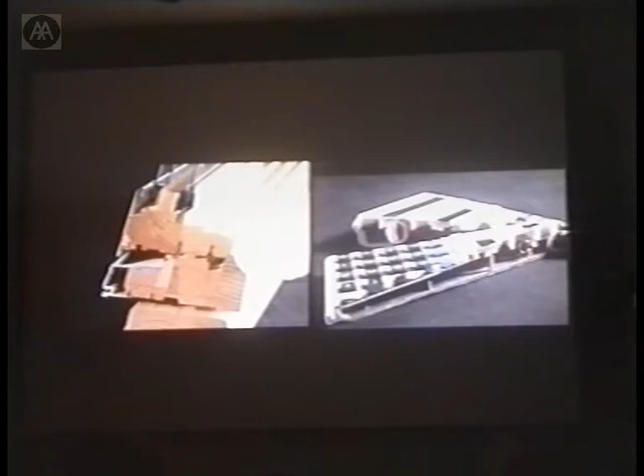So it's actually the reason why we chose the bridge to demonstrate something tonight. First of all, we chose the bridge because it is actually not a building. It's a kind of an engineer's piece. It is quite cheap. I mean, this bridge cost about, I don't know, 400,000 pounds or something like that.

It is very simple. Everything is open. One has the idea that one can see every part of the construction, and it seems to be very simply assembled. Everything is visible, but everything is secretly held together by statics, by structure, and by some technical processes.

And the second reason why we chose the bridge is because I think it is, and I didn't know when I was invited, I think it is a problem to have architects build a bridge. I heard that in London at the moment there has been a big competition about a living bridge or something like that, and I have only seen some small pictures of 2 or 3 projects, and I thought it might

be interesting to have a kind of an antithesis to that, because our main effort with this bridge was not to separate the architectonic from the static interest or idea, but to bring them together up to the point where the structural aspect and the architectonic or sculptural aspect is inseparable.

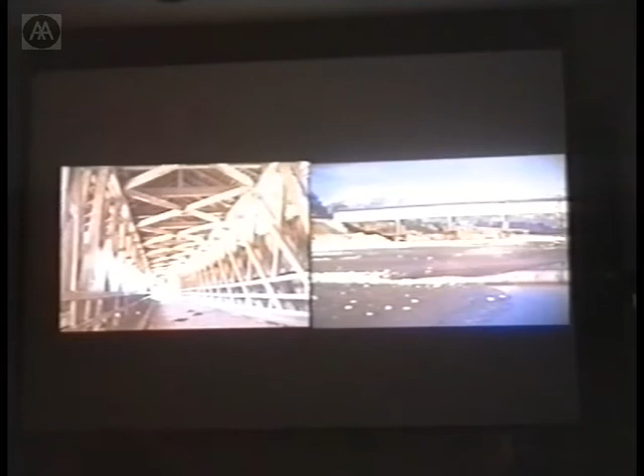And when we started with that, we had the aim, or we had the idea, to completely change these systems. The next one, and we came up at the end with that scheme. Actually, the scheme is very simple. You have 2 chords, an upper chord and a lower chord, and 2 types of kind of shear walls, here one and here one, thank you, and a second bridge which connects, as we can see, by a stair, another point on the riverside.

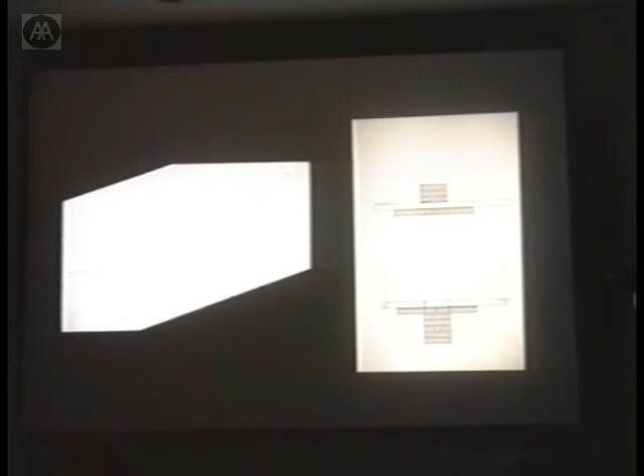And on the right-hand side, you have the type of section with these 2 chords, with a type of bar on it to support the roof, and a bar on the bottom to support the floor. So this is actually the system. Now, to understand how that worked, I have to explain how we came to develop this type of, I think it's a new statical or structural system, not only in wood but maybe also in concrete or something like that. The next one.

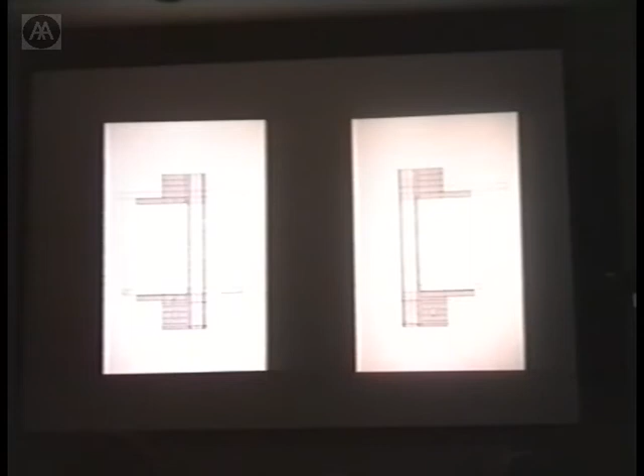First of all, there were two reasons. The first idea we had was, these are the end sections with these hollow shear walls on the end here. The first idea we had was, the next one, that we took a law of building wooden bridges and somehow perverted it. And this law says that

traditionally, for centuries now, you had a bridge with, for example, a truss or a structure which is made entirely of wood, and which, in order to be protected from the rain, has to be covered by a secondary element like the roof or the wall, which can be the railing or I don't know what. And we thought it might be interesting to develop a wooden structure which shows the quality of the structure itself.

So this was a Swiss bridge of the 18th century, which doesn't stand anymore, unfortunately, which is a fantastic structure, in my opinion. But it was completely covered, of course, in the same type as this one here. And therefore, we tried to develop a structure which protects itself by the roof. The next one. So this was the traditional type.

The basic idea was to work with only one truss in the middle and to have a roof and the floor on top, like with a double T-beam or something like that, which protects the open truss from the rain. Then the problem was that that would make two separated spaces and two separated ways on the bridge. And we tried to find some system which would allow us to connect these two spaces. The next one.

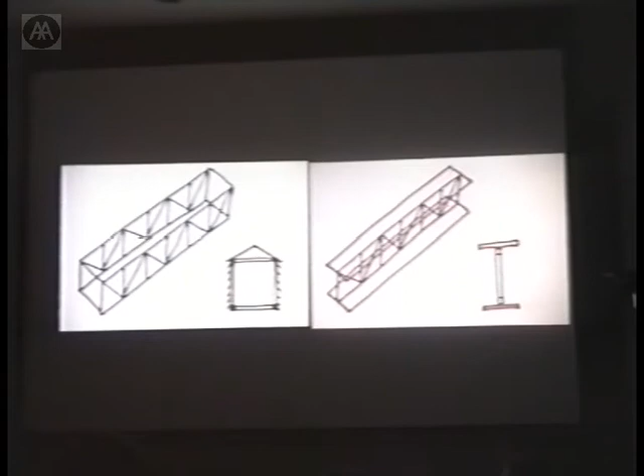And therefore our engineer came up with that Brunel bridge of a truss with such large fields that it starts to lose its character of a grid and seems to be composed of single elements. So we tried to introduce a truss with only three enormous fields of about 15 meters or something like that.

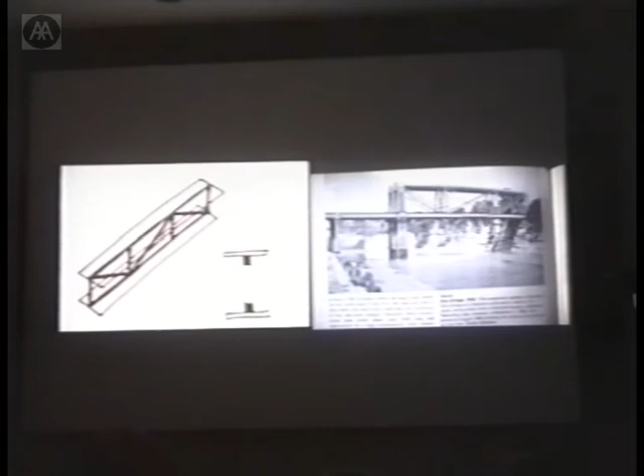But also in this scheme we had this kind of diagonal in the middle which would somehow separate the two spaces, even in the case when you could, for example, pass it, as in this. I mean, this is a very hybrid thing which we liked a lot. But we then, the next one, continued

trying to somehow avoid this separation of the spaces, and the engineer then suggested making the upper and the lower chord so strong that it might hold in the middle without any diagonal, and on the other hand he would make the other fields on the side, these two diagonals, very, very strong. So we had a kind of a window in the middle which connected the two paths on the bridge, and from there it wasn't too far to the next step.

The next, oh well, sorry, I have to go back. That comes later. First of all, I have to explain how that statically works. I didn't know that before as well. So it was developed during the competition. So the next step then was that we covered the end fields and left away these diagonals and made the last fields kind of shear walls. And this system works as follows.

The next one. The traditional truss, as you may know from your education in statics, as architects as well, under load puts stress on the diagonals, which can be in this direction or under pressure in the other direction. The system we chose is a kind of a perversion of the so-called Vierendeel system.

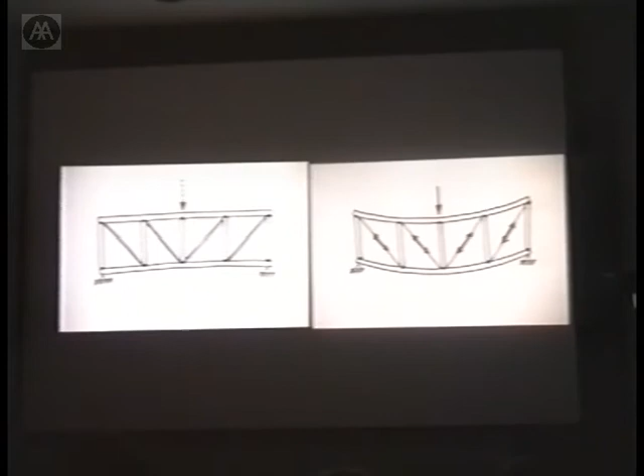The next one. The Vierendeel system was developed in steel structures for bridges at the beginning of the century and avoided these diagonals. As you know, in the truss you have here these joints which aren't stiff at all, and Vierendeel, a Belgian engineer, tried to avoid these diagonals by making these joints completely stiff, so that every vertical post can take a certain amount of shear stress without connecting one joint diagonally to the other one.

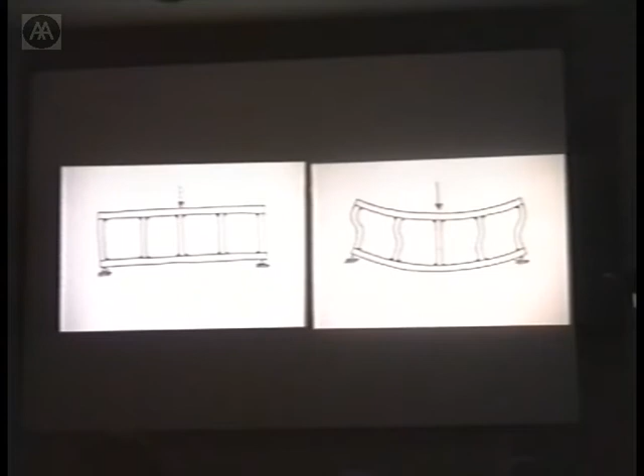And what we made now, the next one, this is one of the first Vierendeel systems. I think it was a railway bridge or something like that, and this is a typical stiff Vierendeel system connection in the edge. The next one.

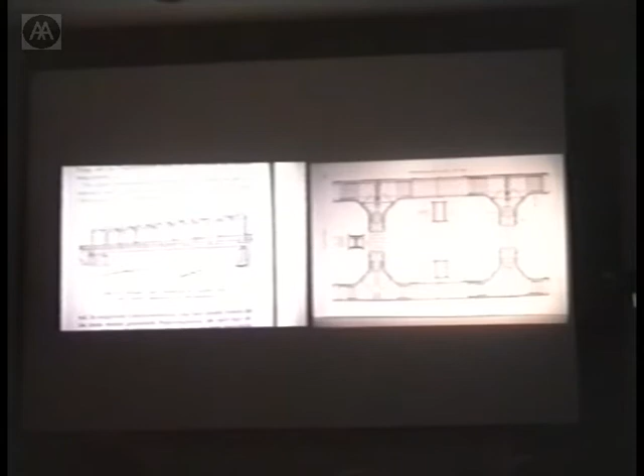And what we then made out of it was a kind of a Vierendeel system with extremely huge posts, which are these walls, and with an enormously strong, very heavy chord in the middle. That means that you, of course, have enormous stress in these edges, because the bridge is about 50 meters or something like that, which isn't too small. It's also not too big, but it isn't too small for a wooden bridge. And these shear walls here now work like the posts in the Vierendeel bridge.

So you move all the stress from the middle through this point into the walls, and this deformation, I mean, it never will deform like that, of course, but it shows you how it really works under stress.

The next one. So the other reason was, now we had a kind of a system which was perfect in our opinion for our first target, that we had the structure in the middle of the bridge, and it was protected by the upper chord and by the lower chord from rain, so we hadn't to cover it anymore.

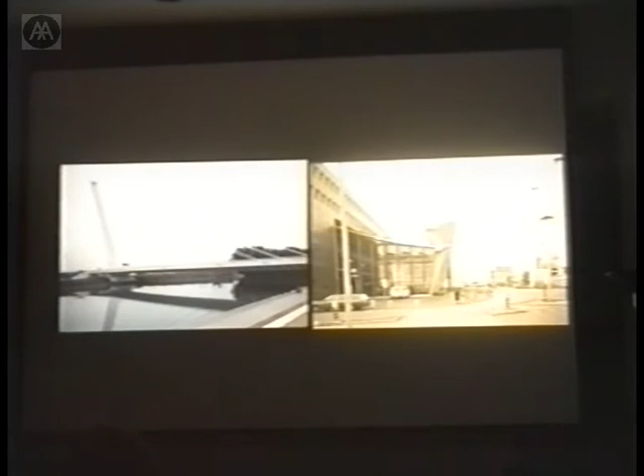And so therefore, I didn't know that in 2 days you will have the next one, you can hear the contrary, because Calatrava will be here, and the slides have been in before, and so we did exactly the contrary. And Calatrava's target is somehow to work with the stress or the load and things like that as some visible quality of the form.

And therefore, he also somehow is perverting this old law of honest constructions and things like that, because as you may know or not, all these things, also of Calatrava and all the other bridges, you seem to understand in reality work completely different. So when you really think that you understand how, for example, this roof really works, you know, with holding back some load and pressing down and here, things like that.

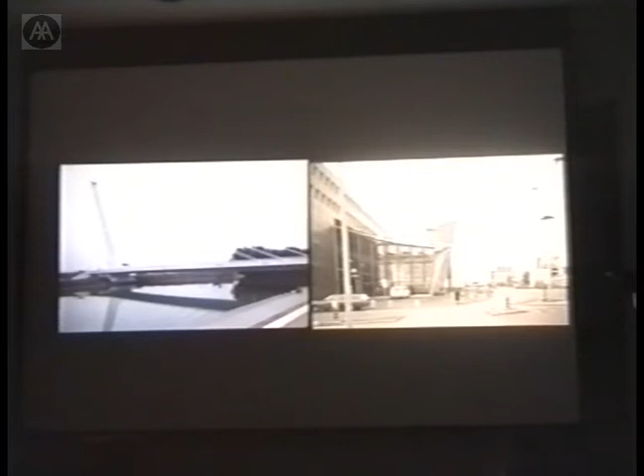This is completely manneristic, but it's not a critical look on it. It's just a description, because it demonstrates something that in reality works completely different. And maybe it's not so different, but it is much more complicated. Even this bridge, which seems to be easy to understand, in reality works as every bridge does, in a very,

very complicated way. And I think it's a quality of the computer age that today we have the means that we really can somehow reproduce what happens in such a part, or also in our bridge, or what really happens in such a situation here. And I think that somehow destroys this idea of having a direct connection between how things are formed and how they really work in a structural way.

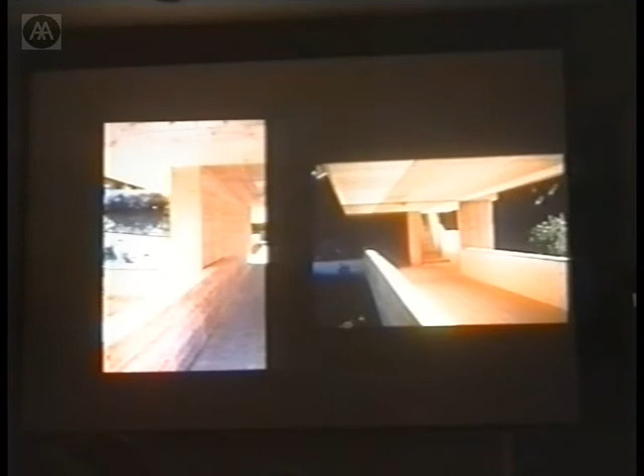As you can see, this bridge is made out of a system which I'm going to explain now, which is not joined anymore by beams or bars or things like that, but most of the things are glued together, and it makes a completely homogeneous surface. And the surface is not only a surface, but what you are seeing here is what supports the bridge. This is the upper chord, for example. This is the hollow shear wall here or here. And all the things are actually the material that supports the thing. How is that made? The next one.

I don't know whether that's known in Great Britain as a system. I didn't know it before either, even if the firm started to produce with that system a couple of years ago. I don't know the English term for that. We call it Brettschichtholz, which is a system based on bars of about 30 by 30 millimeters and a certain length, and then they are glued together to boards, in a way that they can be joined almost without any end. So you can have a board of about 12 meters, or maybe limited by the transportation system.

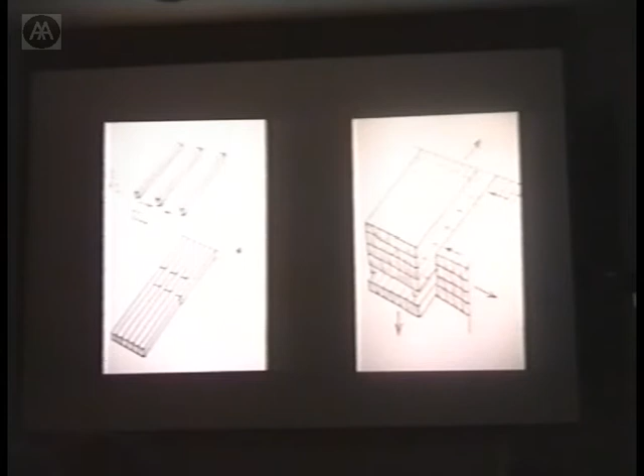And if you have such boards, you again can add them to a kind of a beam. They are all glued together. It's a kind of a three-dimensional plywood technique. It's not plates or sheets, but it's this kind of bars. And if you have these beams together, by a specific technique of nailing, you can glue together these beams to an enormous mass, and I think this is very interesting, even theoretically, because theoretically you have a homogeneous but completely infinite material out of wood. Of course it's directed by the fiber, but it can grow in every direction.

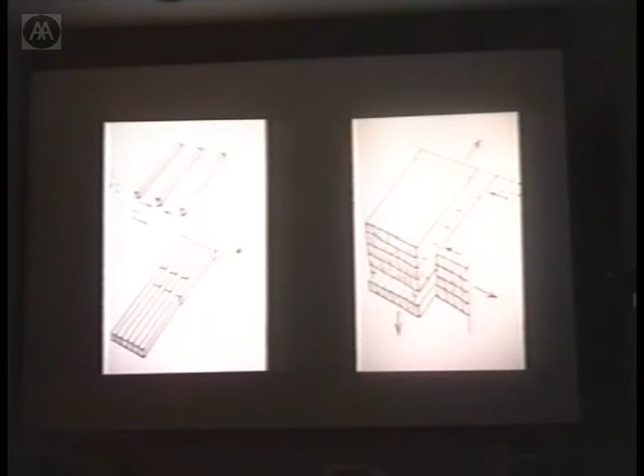And since it is very cheap wood, because the basic element is very small, the cost of the material doesn't play any important role. So it can grow in this direction, or in this direction. And this is the base behind that design. The next one, we can see that under construction. So how they are glued together, they can be prepared in almost every form. So actually the wood here starts to be a kind of a mass, a homogeneous, directed mass, which starts to have some similar properties to, for example, concrete.

And it was also an objection to that bridge that it's not so different to a concrete bridge. And we said yes, that was exactly what we were interested in, because it was cheap, and it starts to have a kind of body expression which wood usually doesn't have. So it has a certain weight and a certain power, a sculptural expression, by this density of the material. And in difference to concrete, it is self-reinforced, because the fibers, other than concrete, are able to accept not only pressure, but tension as well. So you have a kind of self-reinforced material, and this was actually the basis of that design. Out of that we made everything.

So looking on the roof, you see something. The last point that I want to explain is why these walls are shifted out of the axis. You can see that these walls are not in the axis itself, but they are shifted out of the axis. The next one. And this was actually one of the big arguments we had with the engineer, because it made him a lot of problems in terms of torsion.

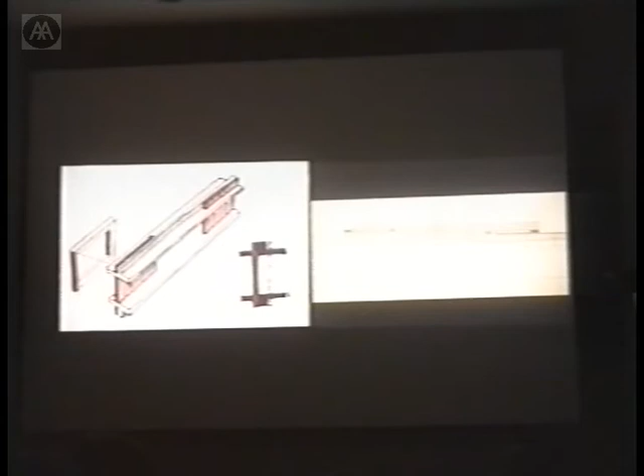And I think Jürg spent many weekends to follow our argument that we never would accept a wall that would be exactly sited in the axis, because we had a feeling that this kind of blade of a knife would separate again the spaces, and we had some other ideas. So we suggested to organize them on the side of the upper and the lower chord, and you can easily see why. The next one.

The reason actually was that we always saw this bridge like a building on the water. It was not so much about only a connection of points, but we saw it in the tradition of the Palladian bridges, which now are also, I think, the images that are in the mind of the people that organized that competition here in London. So we saw it in that tradition, but not separated between the bridge and the building as it always was. So we wanted to organize the space on the river in a way that it's organized completely by the static elements.

The next one. And the other tradition, of course, which was interesting for the building on the water, was the traditional truss bridge. But also this space is a kind of a tube, a connection between points, and we wanted to organize it more in a way that the space comes to a certain quietness on the water. The next.

Of course, the system we were developing is related, or seems to be related, to a certain style tradition where one organizes the space only by walls. But actually we had quite a different idea. You can see that in the difference between a medium and an early Mies van der Rohe building. The next one.

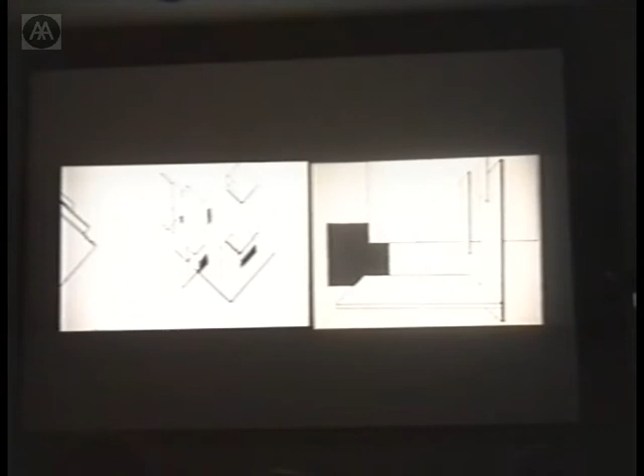So this famous Barcelona pavilion somehow gave us some ideas how that space should be organized. So by walls and the roofs and the floors that somehow are not, like in the De Stijl buildings, the end of the building, the wrapping of the building, but somehow in the middle of the building, organizing, activating a space that is completely open.

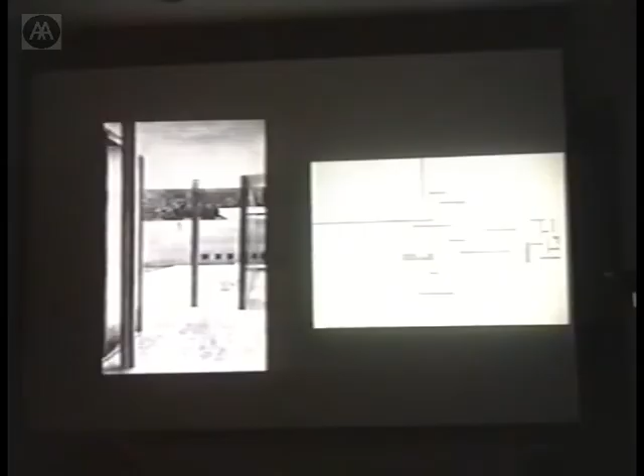But in contrary to the Barcelona pavilion, we were more interested in this very early scheme of Mies van der Rohe, where the elements had a certain materiality, a certain thickness, and a certain sculptural presence. And the next one. We had the feeling that if we would organize it, this is about 80 centimeters or something like that, this very heavy element couldn't be in one axis, because then it wouldn't work, as we saw it as kind of directed columns.

So they should have a certain autonomy, and not be a kind of blade of a knife that cuts the space. So we separated them out of the axis in order to make them somehow independent, working as a sculptural, material element on its own. The next. So this is the space on the bridge itself, which actually was the main subject of the whole design.

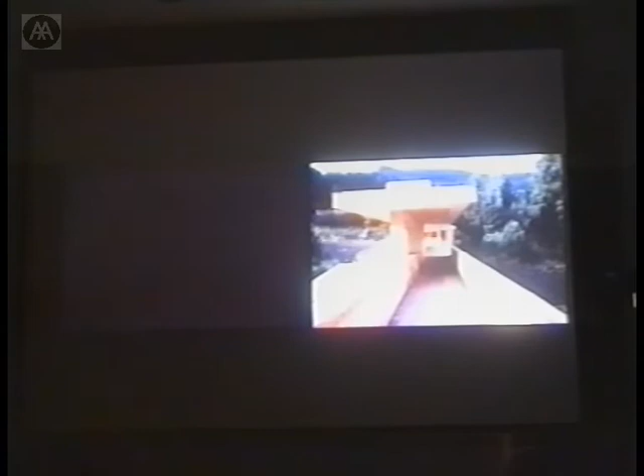The next. The next. And here, that's difficult to explain because it's very hard to see in the pictures. But in reality, you can see that it's really very important, which is now visible for the space in the middle, that these walls are shifted. But there is, of course, another reason how that scheme was developed concerning that shifting out of the axis. The next one.

This is the space in the middle with this kind of ribbon window without any post. That's the point where the heaviest loads are on the bridge. The next one.

So one day I came and I was quite astonished, because we had a lot of problems with the community there at the beginning, and they were extremely against it. But at the end, they accepted it really as a building, and they now have parties on it. And I was so shocked when I arrived that day that I forgot to take that picture.

But there was a kind of popular Volksmusik band on the bridge, the floor was all wet with beer, and they roasted sausages, and this was incredible. And okay, that was the space, but actually that was the idea we had. Not exactly the party, but that it was conceived as a space on the water. The next.

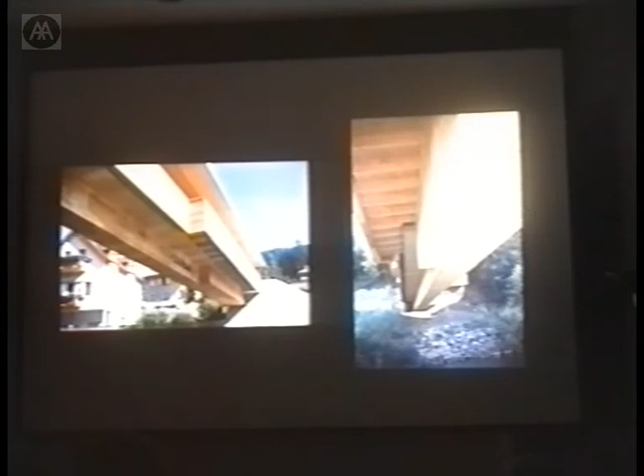This very slim section I mentioned before gave the engineer a lot of problems. He had enormous problems avoiding this kind of torsion in the shifting, because the section was that narrow, and that's the reason why this hat section was made, so that the upper and the lower chord are a little bit stiff to avoid this kind of torsion. The next one.

And this one is maybe more interesting for the architects, for conceptual reasons. For us, it was quite important that the longitudinal and the cross section have somehow the same type. So this kind of window, or the eye, as we call it, the open space in the middle, is organized in both directions, and actually it works in both directions.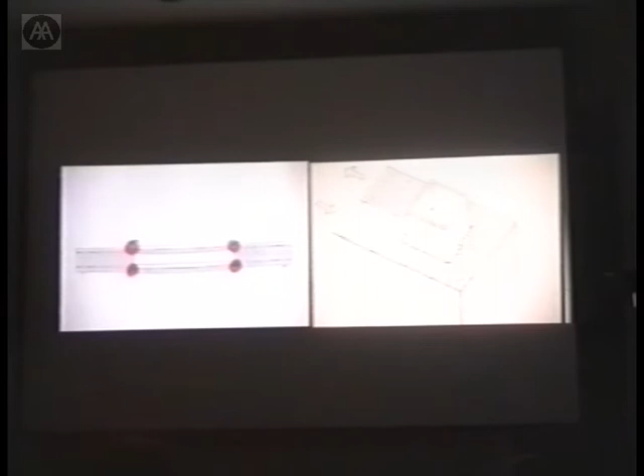And when we insisted on organizing the shear walls on the side of the upper and the lower chords, the engineer tried to use the surface between these two elements to connect them and to organize the joint between the two prefabricated elements. And he invented this system of the ductile shear connection, which I'm going to explain now. The next one. The problem actually is that you have, of course, in wood a lot of tolerance problems.

So if you would take screws to connect the two parts, the holes which you, of course, have to make in the workshop, they never meet each other precisely. So if you have on this edge, where you have all these shear stresses, dozens of screws, the holes may be organized like that, so they don't meet each other. So if the stress comes and the two parts start to move, maybe the first element will break before the other one even has some load.

So it seems simple, but it's a real problem, and therefore Jürg developed this kind of ductile connection, the next one, which is actually, I think, a very interesting system. He took some tubes, just regular steel tubes, which he then introduced in this kind of nuts, and of course they didn't meet each other precisely either. But this system somehow is plastic or elastic, and the trick behind it is that, for example, this one can be deformed without breaking before that one starts to take load as well.

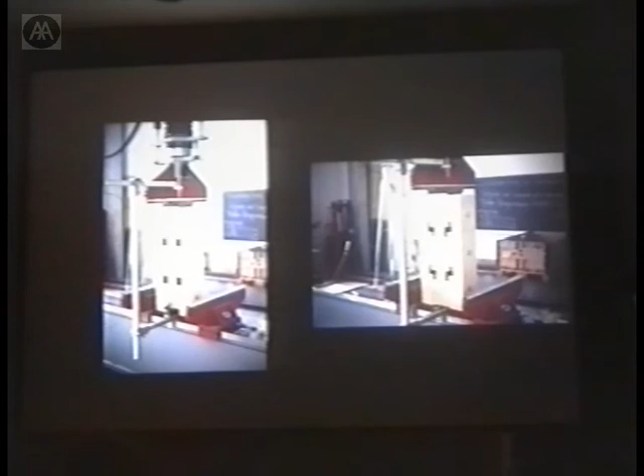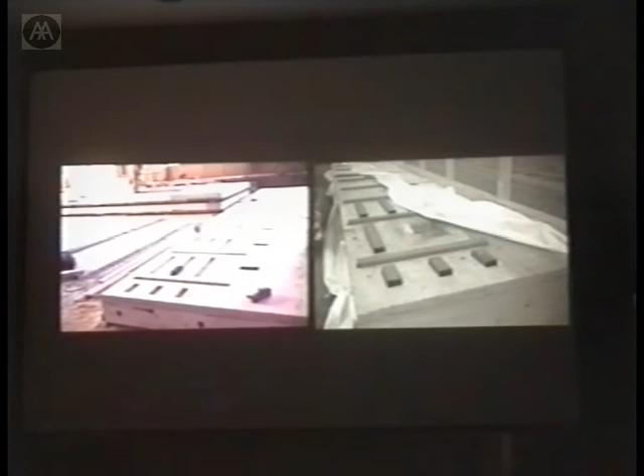And we tested that in a laboratory, the next one, and we could prove that even a completely deformed tube, that has a deformation of about 3 centimeters, is still able to take the stress that it has to. So we were able, the next one, to make all the nuts in the workshop. These are the tubes then introduced. This is one of these hollow shear walls in the factory. So we could produce everything in the Vorarlberg, the next one, and made this process.

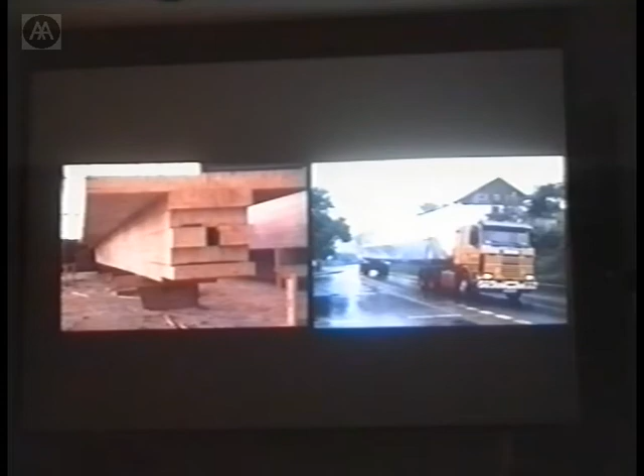So actually the bridge consists of 6 main parts, which were transported throughout Austria by these trucks. It was quite impressive. And then, the next one, they were built up within 2 days. We can look at this. It was kind of a theater spectacle. Next one.

So they were only pressed together by these tubes, and then some screws, which do not take shear stress, held together all these 2 parts, but they only press the wood to the tubes. The next.

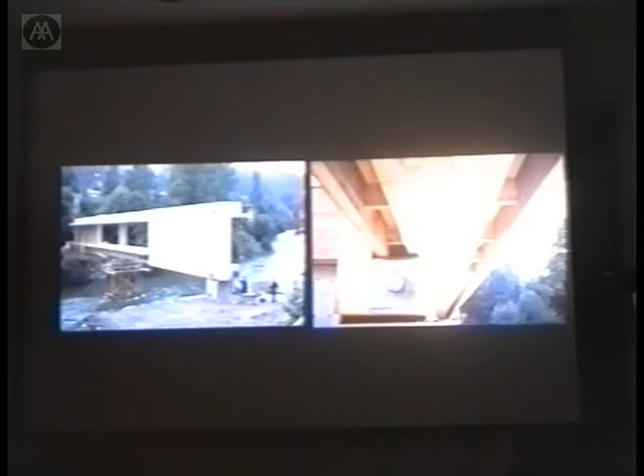And at the end, the next one, at the end there was a kind of... actually it's not a pre-stressed system, but the lower chord was connected by a post-tension. So it's a huge cable; it's maybe the first wood that is pre-stressed or post-stressed with quite a load. It was quite a heavy force that was brought into that lower beam in order to stabilize the whole system and to connect the middle joints. Next.

At the end, the middle post was taken away after a couple of days, and then the rest, the roof and the metal sheet and things like that, came. The next one.

So actually, at the end of this explanation, of course I had to explain a lot of technical things because, as I mentioned before, without an interest even in that kind of practical, material, constructive, even engineering things, it wouldn't be possible to organize the scheme of a bridge in the way it was. But of course, in the end our interest never was technique. It was not even construction, not even the engineering, but it was the form and the space and the sculptural quality of the wood that interested us, and we used everything somehow to reach this aim, to find this form which is like a non-engineering form.